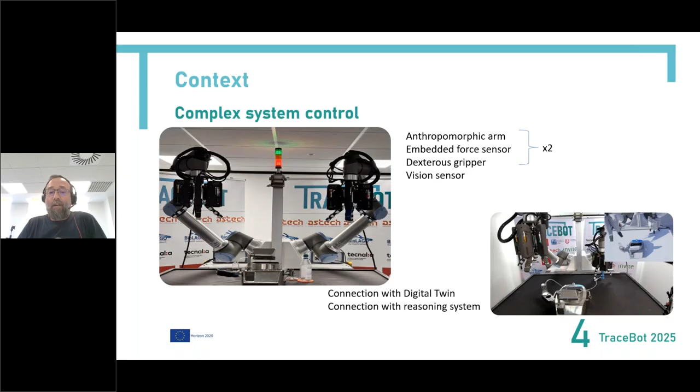So a lot of elements to control, a lot of interfaces to handle, and it's not that obvious how a non-specialist can handle this. And so what we are interested in is making a bridge in between the operator that is not necessarily a robotics specialist and this complex platform. And to do so, I'm going to present different levels of providing some support at 3 levels.

I will start at the action representation, the skill mechanism that I briefly mentioned in the first session. Then we will go toward the programming interface that is proposed to the operator. And then we will also look at the low-level control that may not be of interest for the end user, but is quite important for the integrators, and to show how we propose to implement a complex behavior with our system. All right.

So as I said, to represent the action and also to simplify the execution, we are using a skill framework that consists basically in abstracting each of the capabilities of the system. So that any operation that can be conducted by the robot, that can be detect an object, grasp an object, move towards an object, insert the canister, is represented as a skill. So that the process will be then a collection of skills to be executed progressively. The advantage of making an abstraction like this is that we can easily agree such interface with different providers or partners, and it will definitely, and it did, facilitate the integration, the deployment, and the execution of the process.

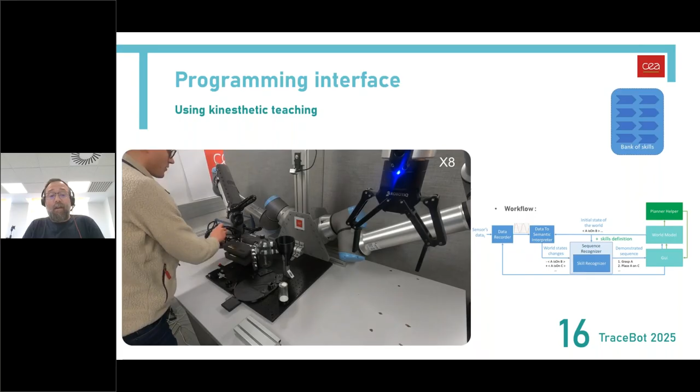So first an initialization to define what is inside the environment, but then our colleague Raphael from CEA is manually moving the robotic platform between the different items, moving one object to its site and so on. And while Raphael is doing this operation, the system is monitoring the signal, the position of the object, the position of the different items, the status of the gripper as well, and that information enables to segment the sequence and also to define some evolution of the environment.

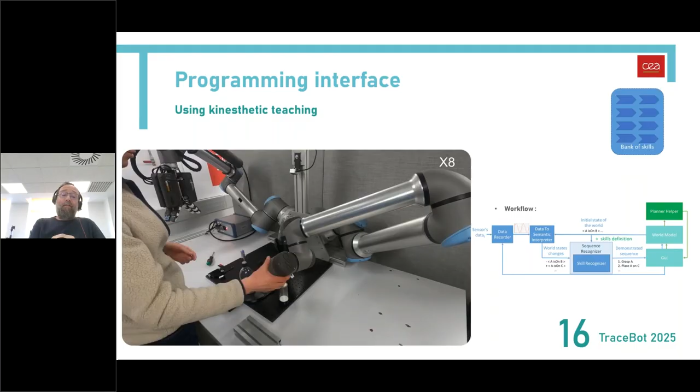And that information is then used, based on the semantic information associated to the different skills, to automatically recognize the different skills that have been used by Raphael in that process, and to generate, as you can see here, a list of actions that could be conducted by the robotic system to reproduce the same operation. And that's what we are going to see in a few seconds.

So here the interest is that by only moving the system, we can show the robot the operation, and the robot is able to recognize what was done. So of course that makes sense when the operator can be in the same environment as the robot, which is usually not a problem with such collaborative robots that are designed to work in the vicinity of humans, but might be in some cases problematic if the deployed environment does not permit having a human inside.

But here, as you can see, the robot is reproducing what was done by the human automatically on its own, according to the automatic recognition of the skills that have been employed. But here we stick to a bank of skills that are predefined and provided. So what if we want to learn a new motion? What if we want to extend the bank of robot motions the system can handle?

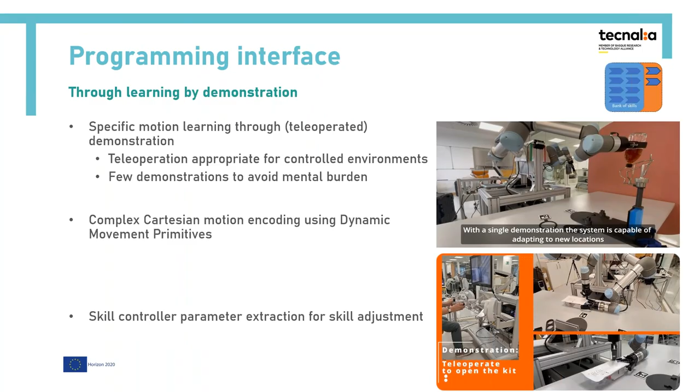So in that case, Miguel again will be showcasing how we can open the sterility kit, and we assume we already have such a skill in the bank of skills. But what we are looking at during the demonstration is parameters that will be used to fine-tune this generic controller that we have. And in that case, we are looking at the linear velocity information and the interaction forces between the gripper and the lid.

And then based on that information collected, the system is able to reproduce the behavior, adapting the motion direction to what was perceived with the human operator, and also take into account the appropriate forces required to pull that layer out of the kit. So these are different modalities that can be used also to extend the bank of skills and to provide the system new motion capabilities.

Briefly looking now at the low-level control, where we have also been contributing. So here the objective is to see how we can define control laws to move the robot from A to B according to some constraints. And to do so, we're also using the ROS middleware. So that's a famous programming environment for robotic platforms.

What is interesting is that this system provides an abstraction of the robot you want to control, and also provides the generic controller management so that, as it is kind of standardized, you have a bit more robustness in the implementation and confidence in the good execution. But still, when you want to use it, you still have to dig into some low-level details in terms of how to implement a controller, and that can be quite complex.

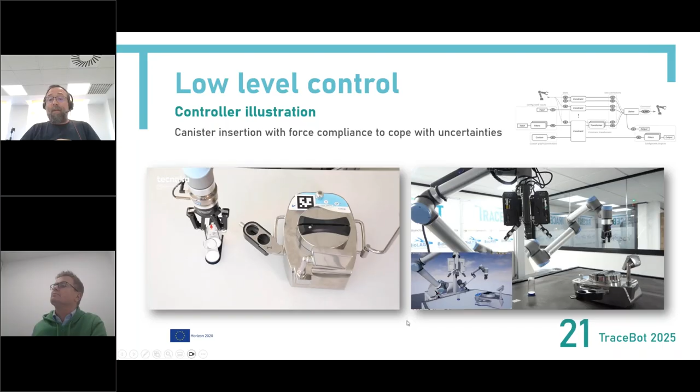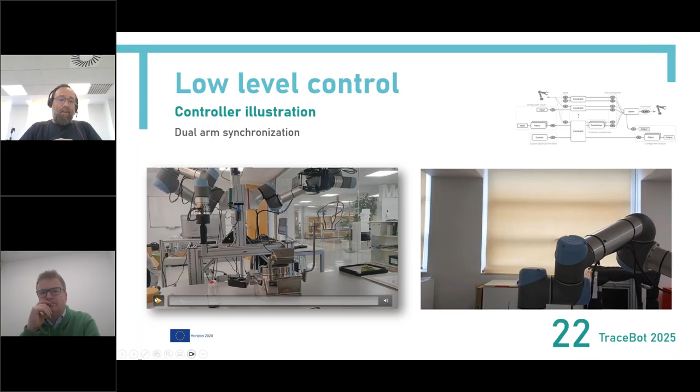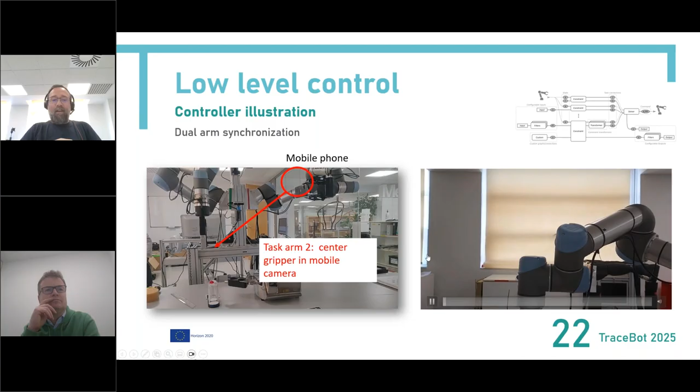And what is interesting with that system is that, as we focus on the task level, and that's my almost last slide, it's quite practical to define the control that you want to implement. For example, here you have a mobile camera on one gripper that is looking at the other gripper. And so what we are going to ask it is to keep this gripper focused in the image. And that's what you can see here. It's not synchronized, but you get the principle out of it.

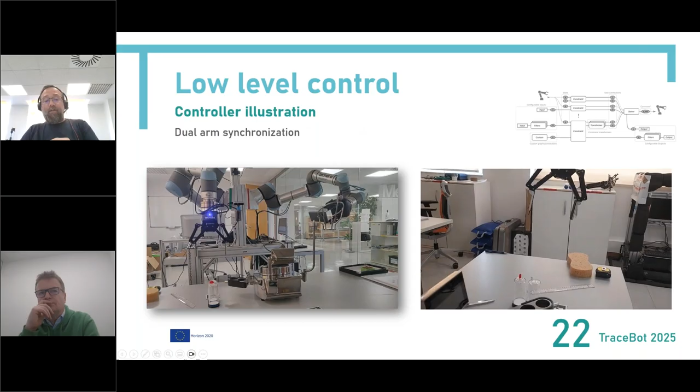And here we are just defining the motion of this left gripper, that is, go and grasp the canister, insert it into the tray. And the control of the other arm, if you try to define it from the outside, can be quite complex. But in the end, it's pretty simple if we just say, I just want the second gripper to be focused and centered with respect to my camera. And this is super simple to express in terms of task if you focus on the frame. And doing so, we can have such advanced following strategies that in the task frame are quite simple to implement.

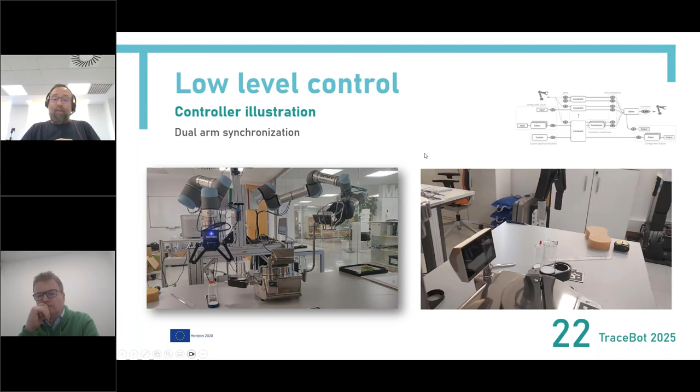And that is typically what we are using to implement a type of joint synchronized behavior that we also use for the tube insertion, where here we are just asking the two grippers to stay at a given distance with respect to each other. So you see here that there is a lot of admittance. My colleague Miguel can very easily move the different arms, and can control just one of the two arms, and they will maintain a constant distance between the two, while still being compliant to motion in the vertical axis. In that case, we have a much easier control of the motion of the two robotic systems. And this is typically the context we were using to enable the insertion of the tube inside the holder.

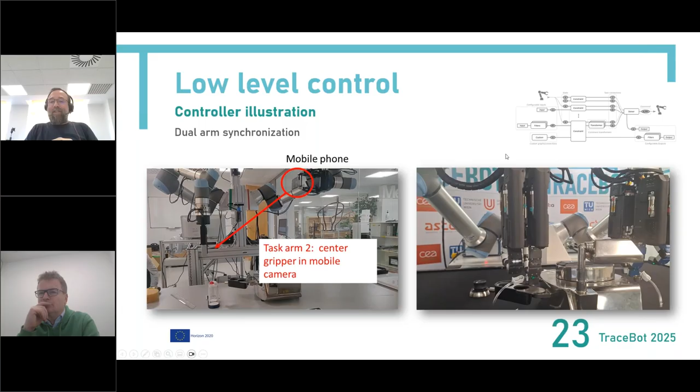So this is just to say that this control framework is quite efficient for developing different types of controls. And just to sum up on this part, there are different levels where we can simplify and help in the programming of the system. At the highest level, it's quite important to have some abstraction because it eases the implementation, the collaboration, and the extension of concepts. Regarding the programming interface, the grounding with the ontology is super interesting because it also simplifies the teaching that we perform there. And at the low-level control that I ended with, the constraint-based modeling that we propose greatly simplifies the programming of quite complex control modalities, and the compatibility with ROS also enables applying it to different platforms.